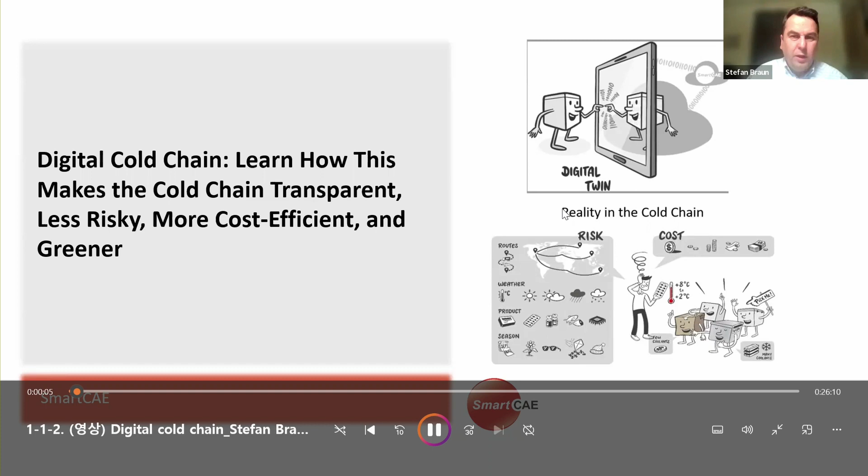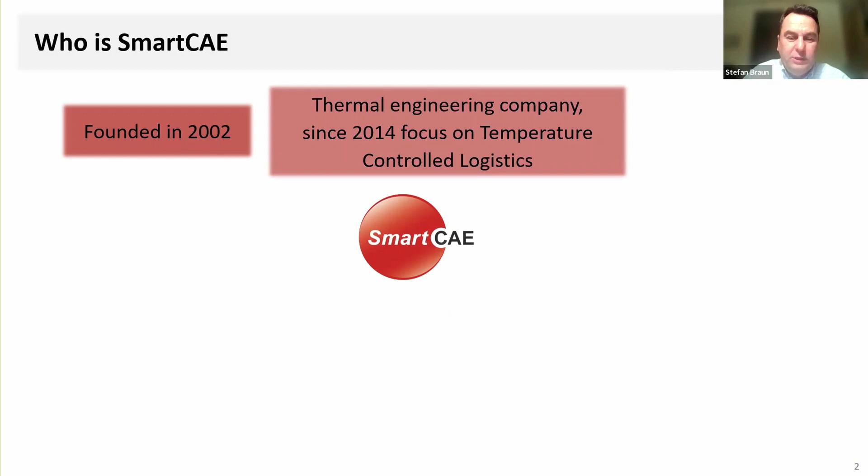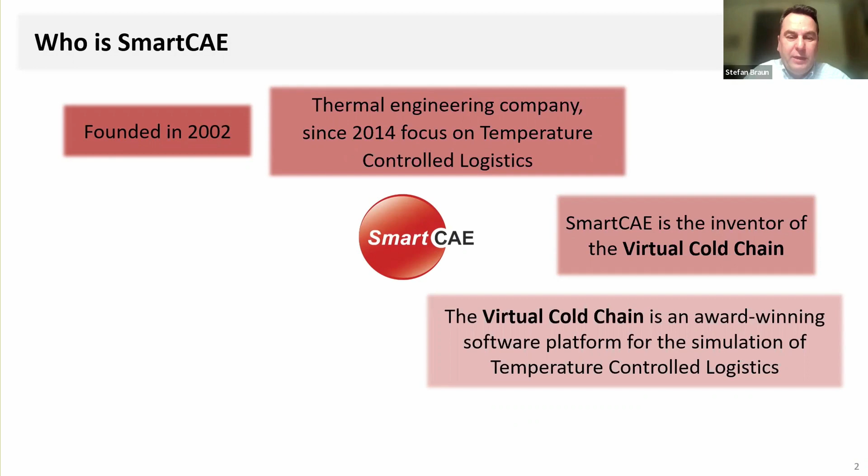First of all, only a few words. Who is SmartCAE? We were founded in 2002, and since 2014, we work on temperature-controlled logistics, and we built a virtual cold chain where we can connect all the different stakeholders on one platform and allow them to get transparency in their cold chain. We have customers currently in 25 countries around the world. We work with 12 of the top 30 pharma companies and with most of the global relevant packaging companies around the world.

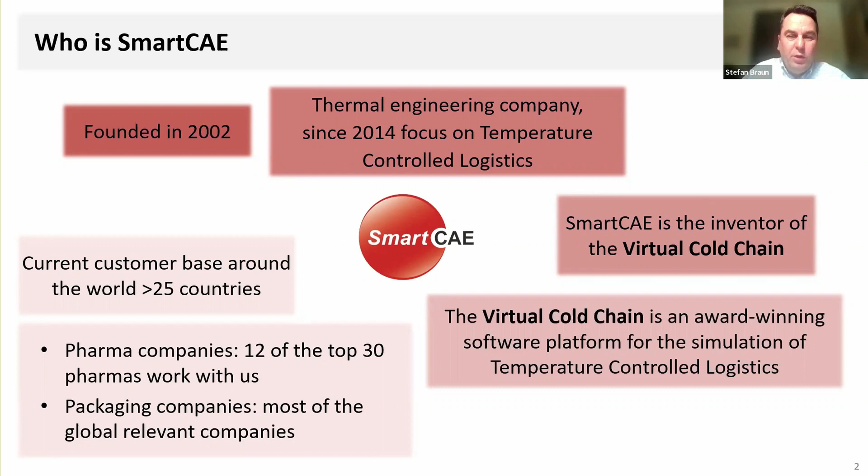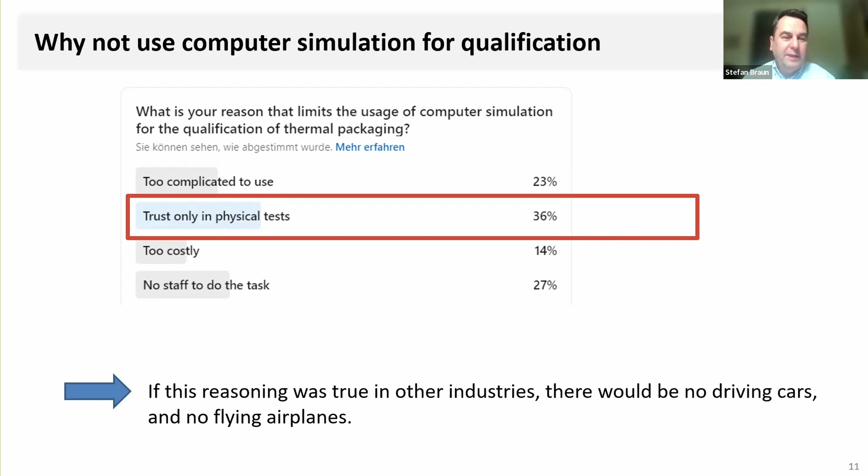So what is the idea of a virtual cold chain as a digital twin for your supply chain? First of all, we try to connect the different stakeholders - the packaging companies, the packaging providers, the pharma companies which have information about the product, and the logistics companies which have information about the lane.

Now we can match this together because we want to quantify, at the end of the day, the risk of having temperature excursions. Once we understand the risk, we can find out what is the right packaging we need on a lane, or what is the right service on a lane, and we can mix it up and find the best combination of both worlds together.

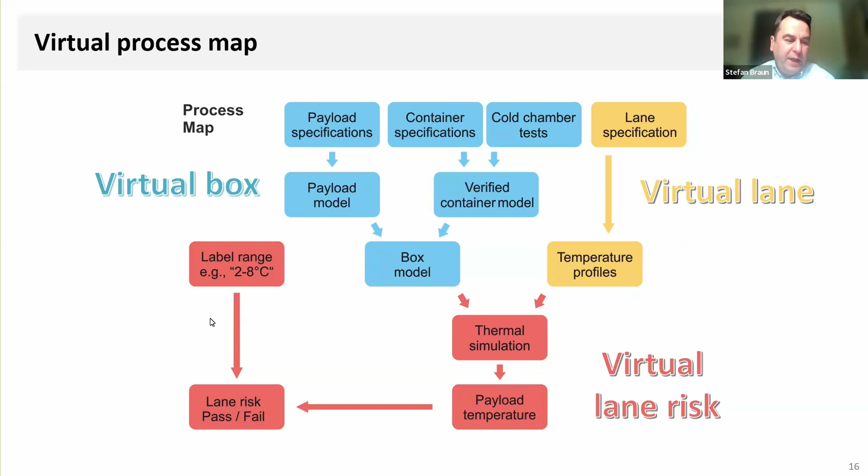The virtual cold chain is in principle made of different elements. One part we call the virtual box, where we have the information of our packaging system. Then we have the virtual lane, which mimics our supply chain environment, like the ambient conditions. If you have a virtual box and a virtual lane, we can run this all together - meaning we get an understanding of how much risk we have.

So first let's look at the virtual box. What is the idea of a virtual box? Here's a short overview - you see all the main elements.

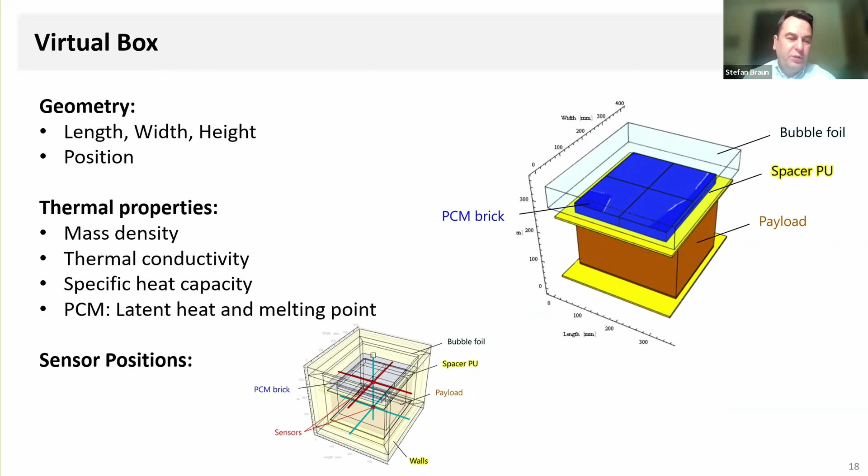You can put in cool packs, virtual loggers, all the parameters like the parameters of your coolant, the thermal properties. Then you can run this and see what happens in reality with all the different scalings. We have the product in - maybe it's a vial or a syringe - and we can also scale it up, say it's a pallet, and pallets in a reefer container, to make it as realistic as possible.

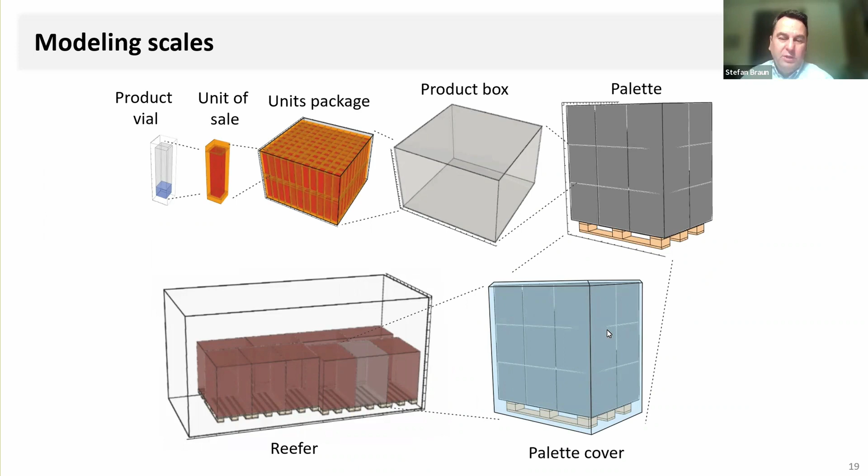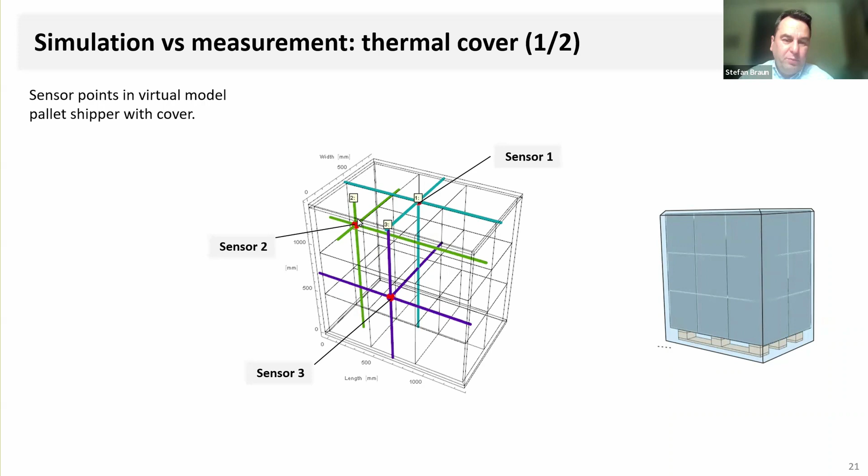So these are 3 different positions in our palette. You see here, these are the 3 positions. So we have one on the top, one on the side, one on the top in the middle. And we see all matches quite well.

But the only thing is, in reality, you have to wait 3 days and wait for a sunny day. In the virtual world, you can do it immediately on your laptop and see how it will perform.

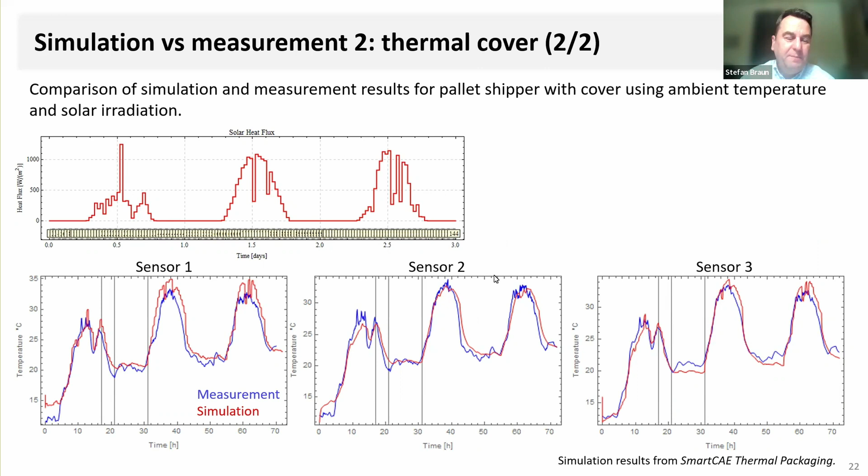So now we have a box. The next is we need a lane. For the lane, you have different options. In the synthetic world, we'd use some ISTA profiles or some worst case profiles or whatever we have.

But the best you can do really is use your logger data if you have ambient conditions. But in lots of cases, you have no ambient conditions about the shipment because it's maybe a new lane, or you don't really have a lot of realistic data. And for this, it's better to use historical weather data, or you can also use the weather forecast if you have this.

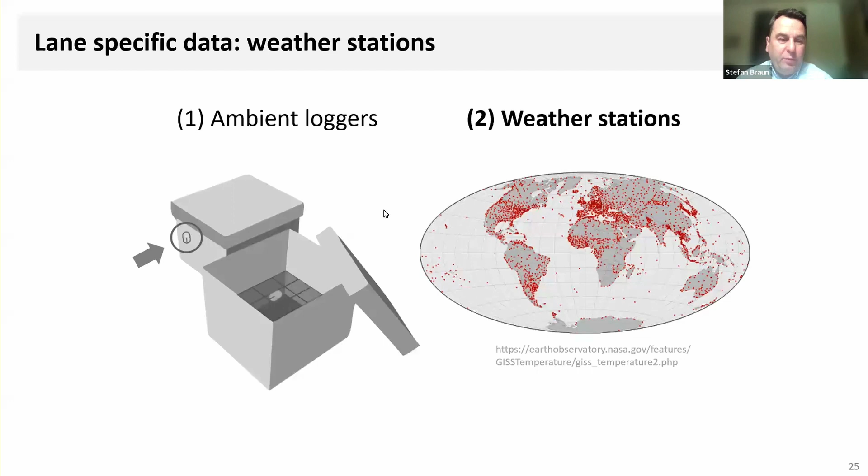So now how do we do this? We access all the weather points here, the weather stations of the world. And with this, we are able now to specify a lane. So you see here, a simple one from Germany over Atlanta to Chicago. And we have the different timestamps.

And we see here, this is ambient conditions, this is controlled conditions, we have here some sun. And then we can select also the weather station you want to use.

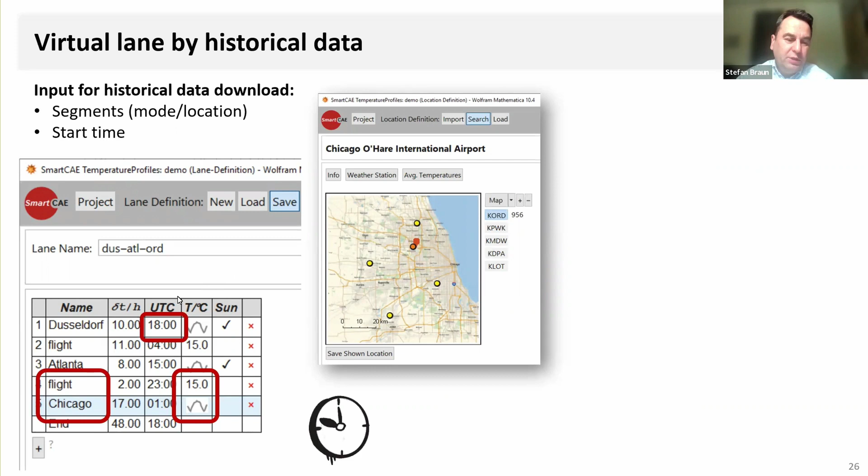So now we can also specify when we start in the supply chain. And then we can download all the lane data from the last, let's say, couple of years. We see here all gray lines are 1 day, and we have around 1,500 days.

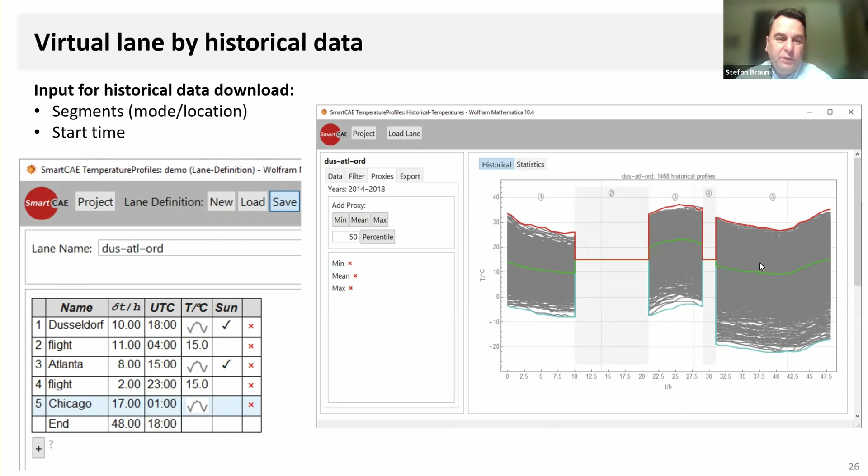And then we can use this to generate a hot and a cold profile, maybe for a test. Or we can use later all the gray ones for a simulation. So we can also use the weather forecast if you want to know what happens tomorrow.

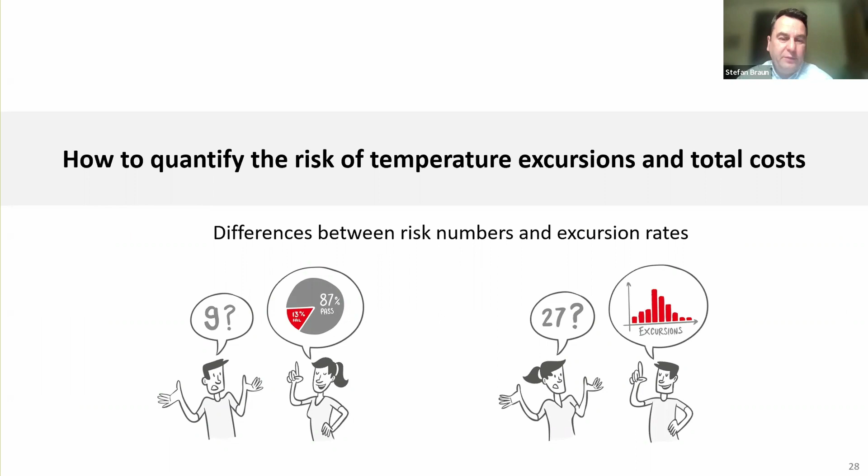But now we have a box, we have a lane. Now we want to quantify the risk and the total cost at the end of the day. How do we do this? We do it relatively pragmatically. We use all the boxes, use all the lanes, run these scenarios, and know exactly how often we will pass and fail. We don't use any risk scoring, because risk scoring is always related to the ambient conditions.

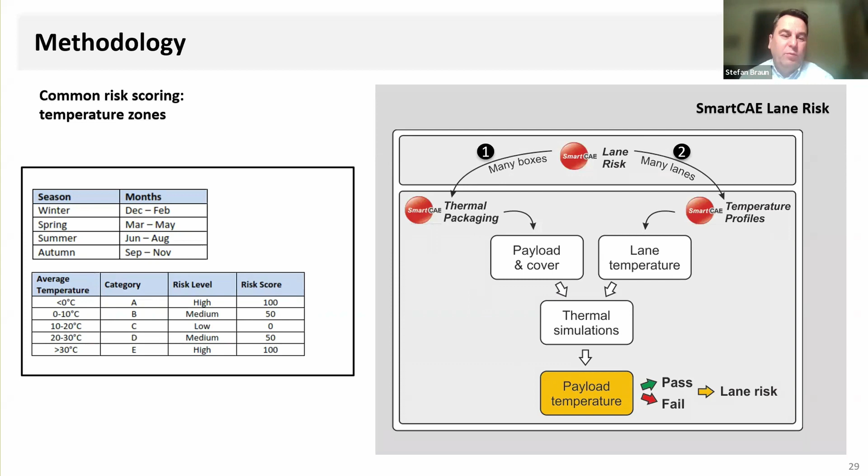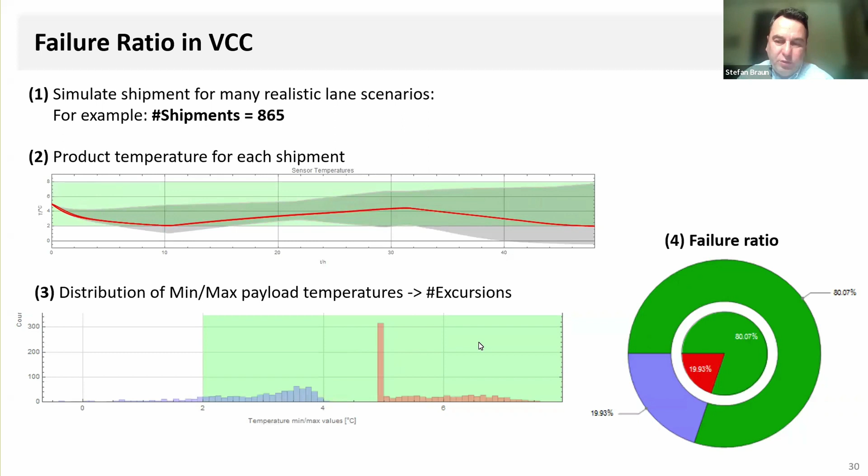And we have now here exactly the number of excursions for these 865 shipments, and then we can specify a fail rate for this. So if we have this, we can also look at the total loss costs.

For this, we have first the cost for packaging, the cost for shipment. We can do this also in an Excel spreadsheet, but cost for compliance are directly related to excursions. So each excursion costs you some money, and if the excursion is too extreme, we have maybe a product loss if we're out of stability of our product data.

And with this equation, we can specify the total cost of ownership for a shipment. And then we can use this to optimize our system.

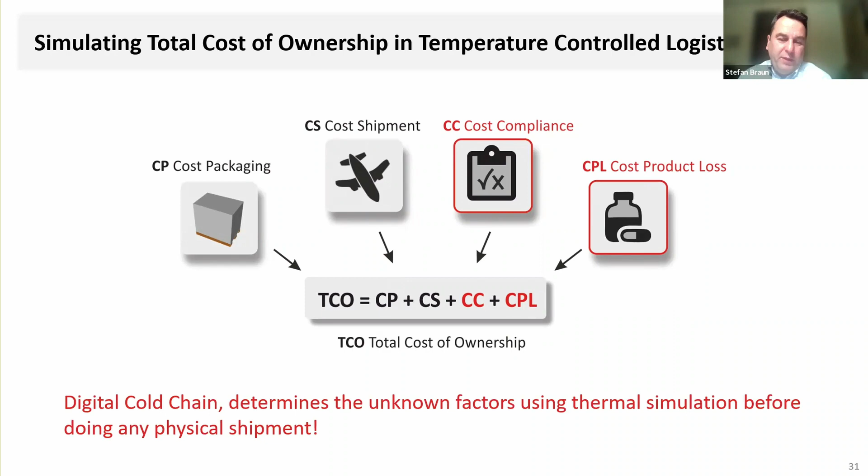So we have in principle 2 types of lane risk assessment. First is we use historical ones. Second is we use predictive.

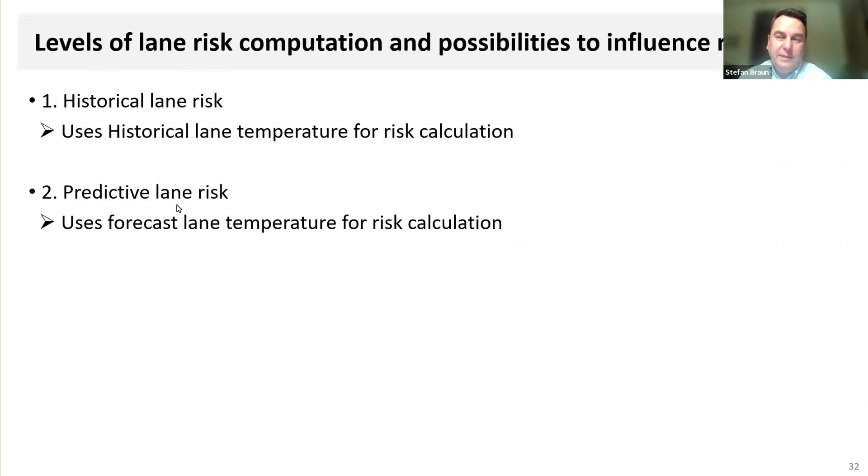For the historical one, we apply historical data on a shipping system. And with this information, we can run all the different scenarios, and then we know how often we will pass, how often we will fail.

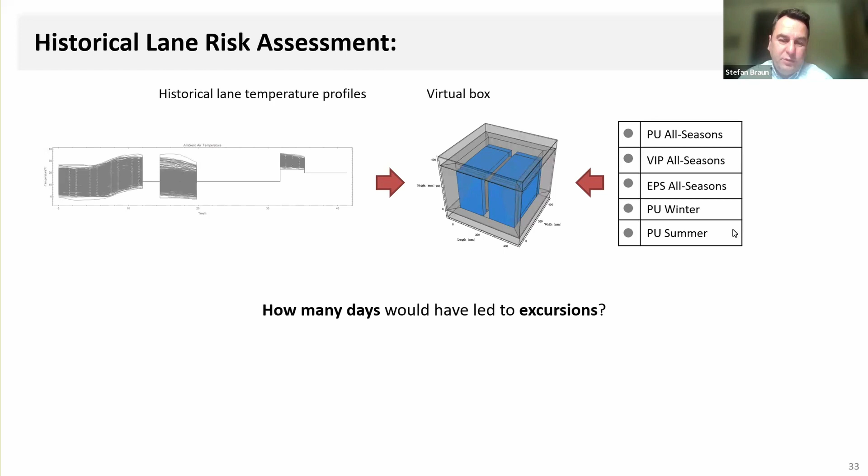The reason for this, like here, is it too cold? Is it hot, or is it hot and too cold? And then we can use this to mitigate the risk. So this means we can use maybe the right box, or we can use a combination of boxes to make the risk as low as possible.

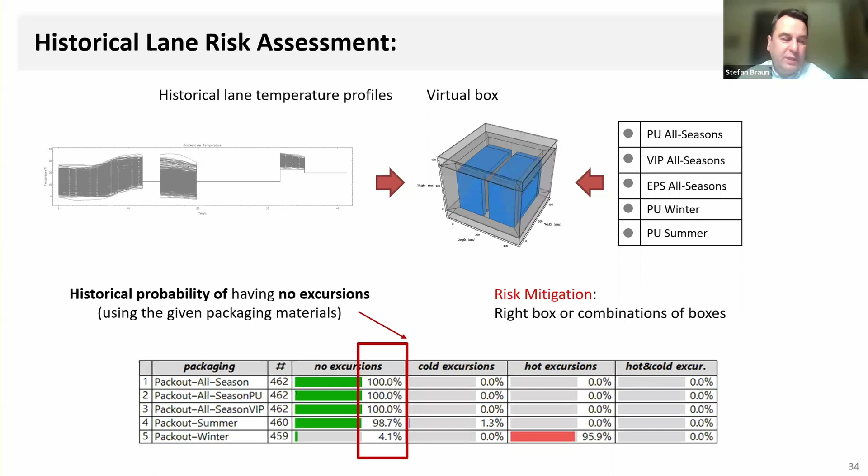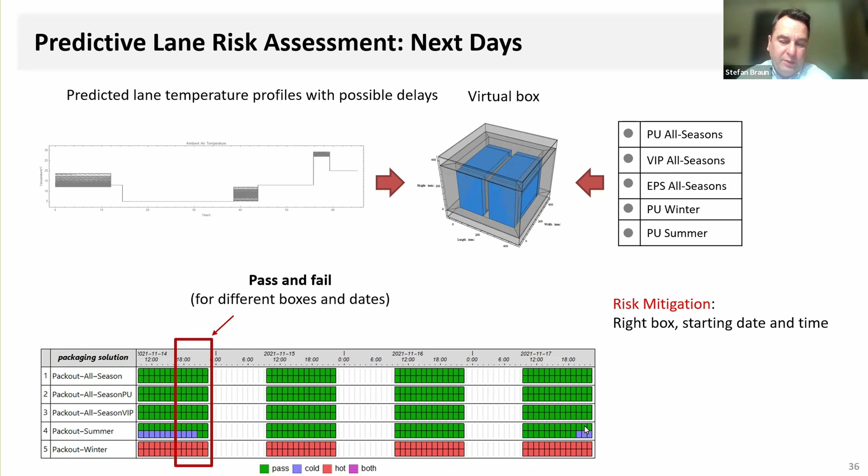If you use a predictive lane risk, it looks a little different, because typically we use the weather forecast for the next couple of days, and then we can get information back and say, oh, on which days we can ship, and which days we cannot ship, and on which hour we run into trouble if our lane starts with this.

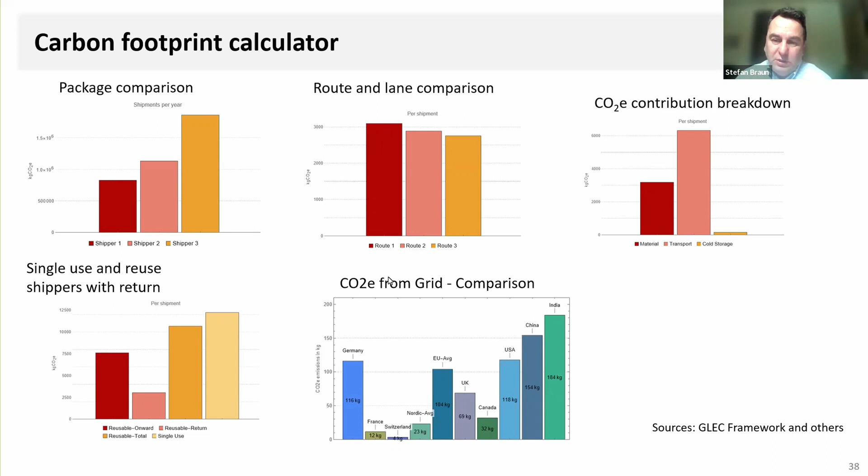Now let's look a little bit more on some example cases. I call them the what-ifs, because at the end of the day, we always look at what-ifs. You know, we have all these different typical questions.

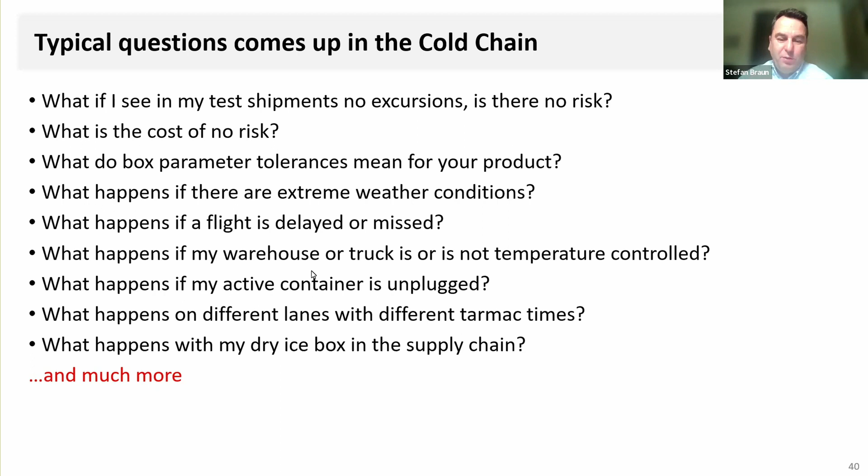A lot of these different things we always see, and we have much more. That's only a small part of this. I will show you some small examples which will address these topics.

First is a typical question: what happens if we have extreme weather conditions? Extreme weather conditions is something that can really cause trouble if we have not planned for it, or if maybe our planning is not good enough.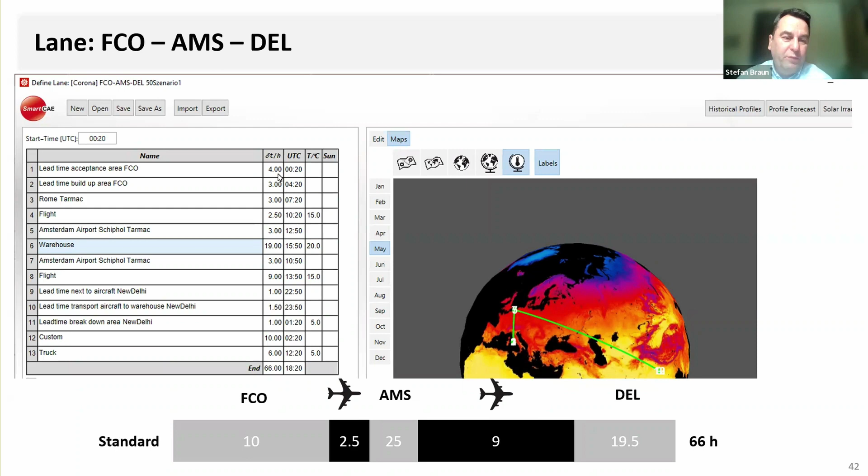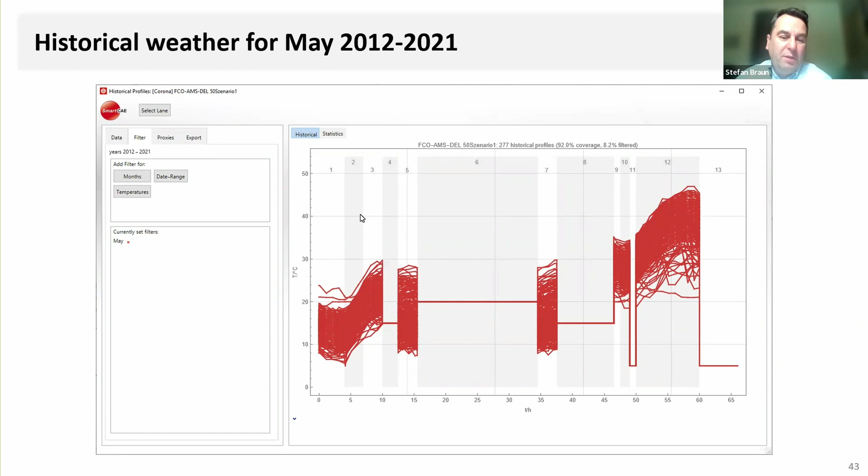I have an example here. I ship from Rome over Amsterdam to New Delhi, and you see here all my timestamps on this lane with all the loading, unloading, and the tarmac time. With this, we can look at the ambient conditions. We look at data from May 2012 until May 2021, and see what happens with our packaging system. We also have some data of our product, 2 to 8, including some stability data of the product.

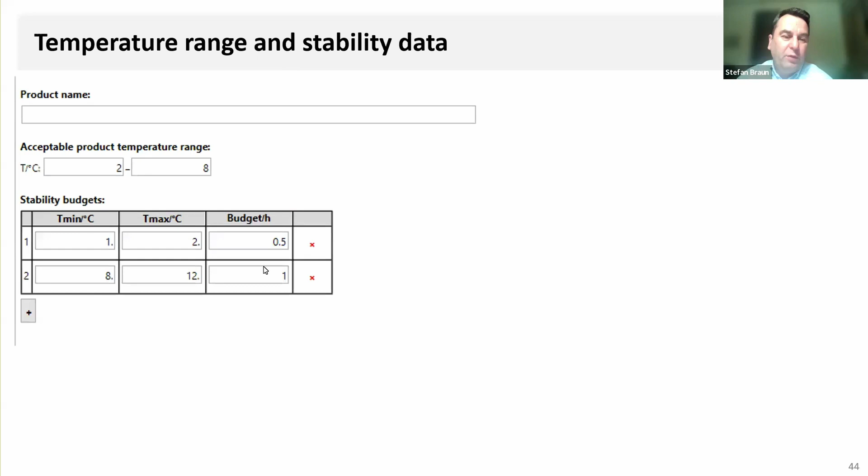Now, if you run this, we see we have 3 solutions here which do the job quite perfectly. Everything's 100%, no excursion, no risk, perfect. But what happened last year?

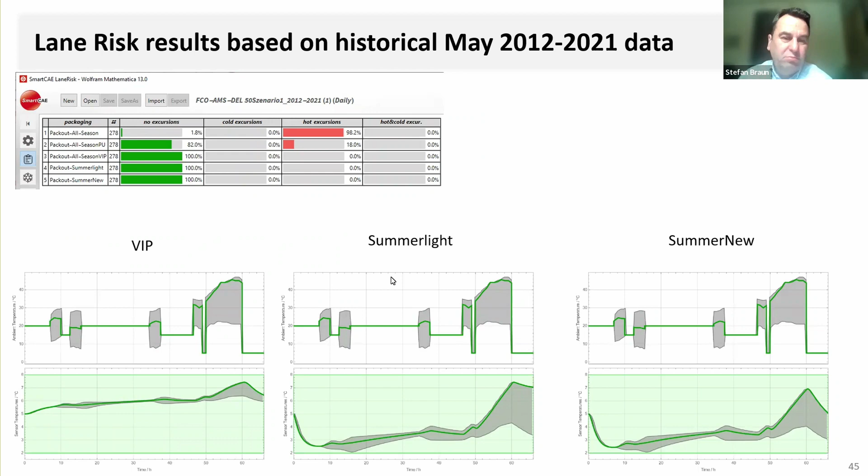We had a heat wave in India, around April, May, and this was some extreme weather. You see here the map of India, which comes from the European Commission, and we see quite a lot of differences here.

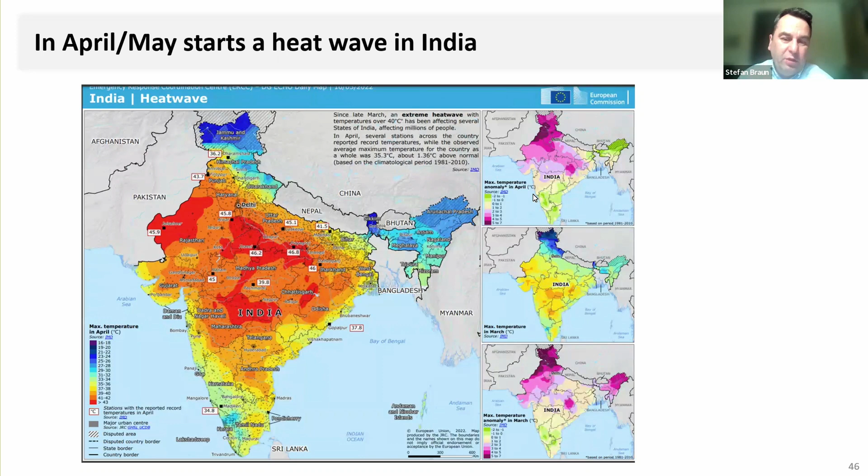If you look at some weather forecasts on specific days, we saw with our three shipping systems that one shipping system shows a problem on 2 days, because the weather was too hot, warmer than planned. We see the ambient condition here, and this is the product, and ambient was higher than planned, so our product goes out of temperature range.

So that's a problem for our product here. But if we look at the weather forecast, we can also say, okay, maybe we ship it a day later or a day earlier, and we are still fine. That's maybe an outcome of this.

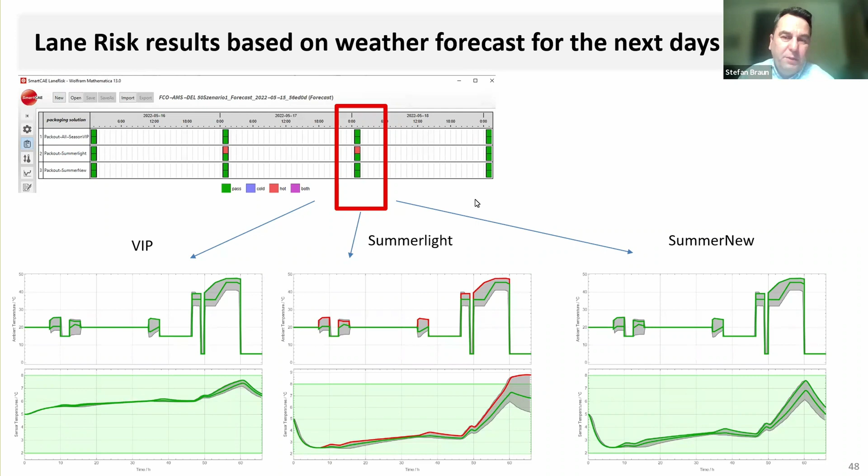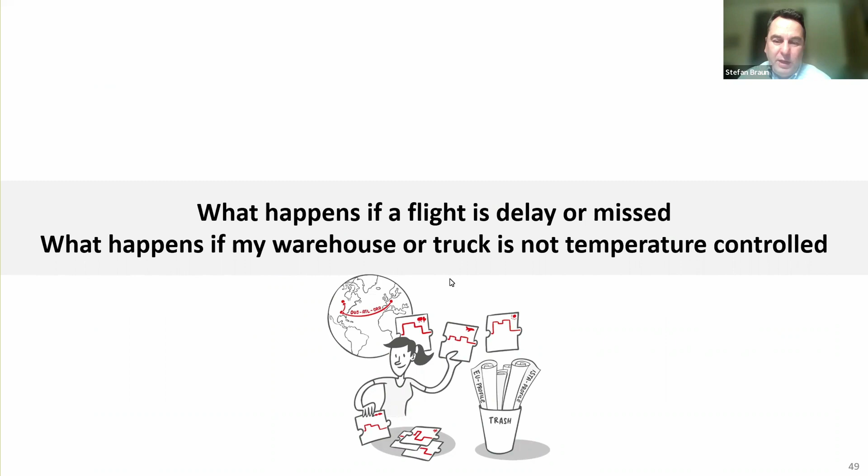But also, in these situations, it can happen that something goes wrong in the supply chain. Maybe we miss a flight, or our flight is delayed, and maybe we don't have the right warehouse or truck. So we use the same scenario and say, okay, that is now our supply chain, and we have the problem.

Maybe our flight is delayed, and if the flight is delayed, we have a 24-hour stop, maybe in Amsterdam for storage. The question is, should we have an ambient storage or a 5-degree storage? We want to figure out with the simulation what this means for us.

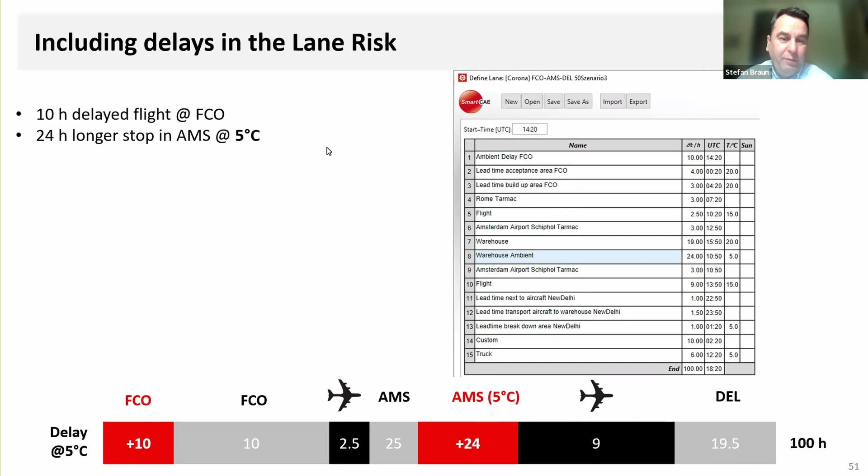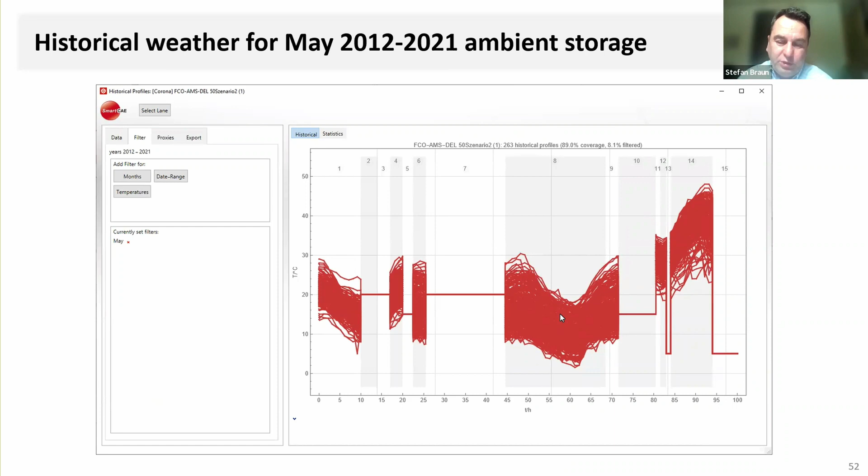And we see here the percentage of fails. What happens now if we put them in a 5-degree warehouse? We see now the VIP box now does the job perfectly. The others show interesting scenarios.

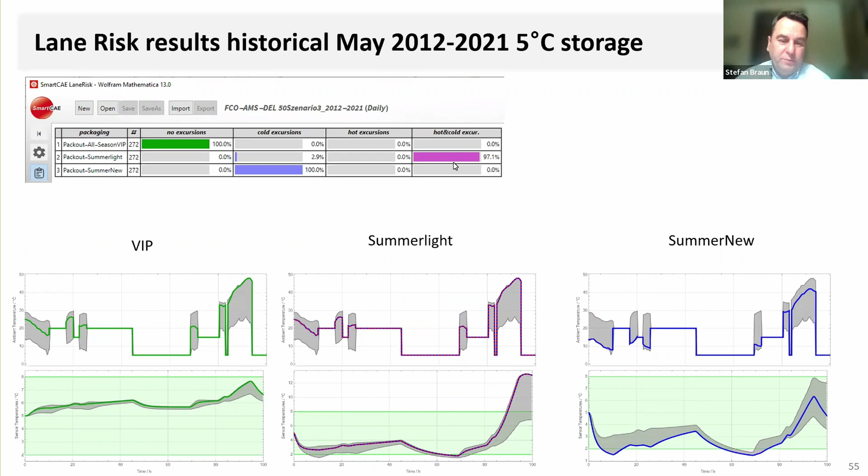The Summer Light box is going too cold and too hot. And the Summer New box, which includes some ice packs, goes too cold, because we have a box which works good in warm conditions, and we put this in a 5-degree warehouse, in principle a winter situation, and then we can see it's going too cold. But this is also an interesting scenario, where we want to figure out what is the right box to minimize the total cost at the end of the day.

So it's a little bit the same scenario. We have Rome, Amsterdam, New Delhi. Our product is 2 to 8. We have some stability data, the same like before. We have some different boxes, and we specify again our lane here. And we know all freight rates are totally different.

Then we have the mass of the product, which relates to the transport costs we have here. Then we have cost for an excursion. When we have an excursion, it costs us some money, because we have to report it, we have to write some paperwork, and this could be really costly. And if something goes really wrong, maybe we lose our product - that's the most costly. And we have also here the number of shipments by month.

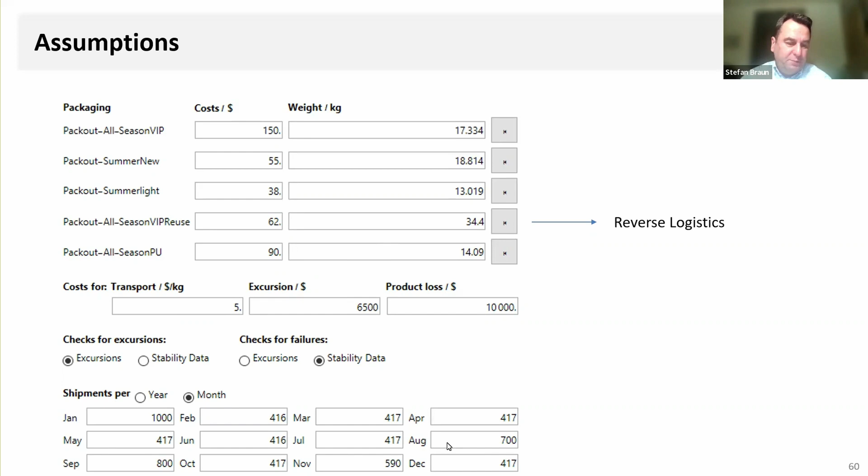And if we use this, we see first on the top level the number of excursions. We see here some boxes do the job quite well, some boxes show some problems. Here, this box has a problem from May to July. But we see also with this picture here, maybe some combinations can make sense. And we see here the exact percentage.

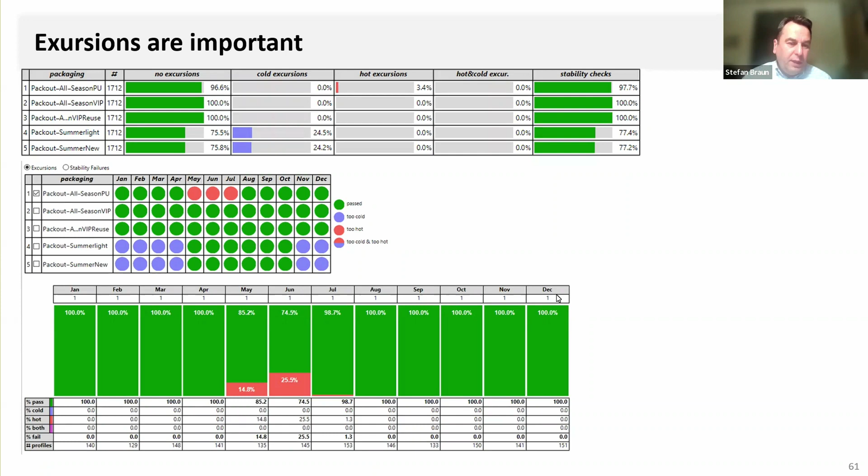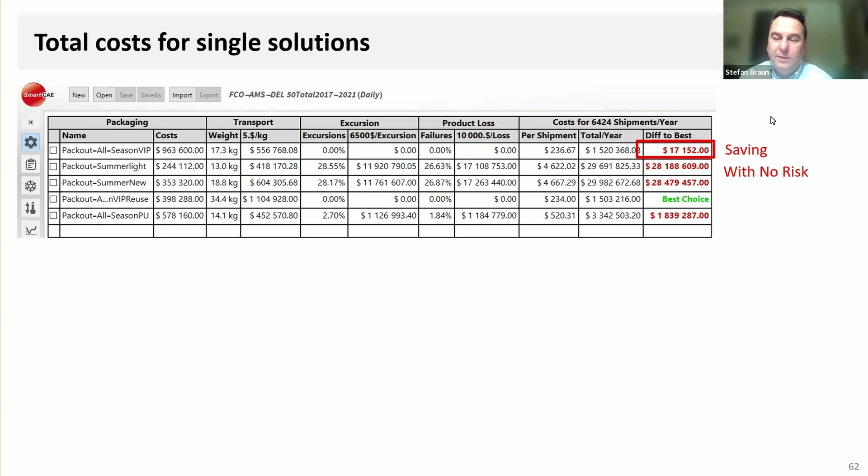We can also go a deep dive in. But now we can also here - that's the most complicated table I have in my presentation here, but it's not so complicated. It looks like we have the cost for the packaging, the cost for the transport, cost for excursions, cost for product loss, and then we get here the total costs by shipment. And with this, we can figure out what is the best choice in a single solution way, but with the system, we can also find out what are the costs for the best combination.

And we see now there's a lot of savings if we use also combinations by months. And we see here we can do it with two types of packaging, the Summer Light box and the PU box. And we save around $600,000 by 6,400 shipments, so around $100 by shipment.

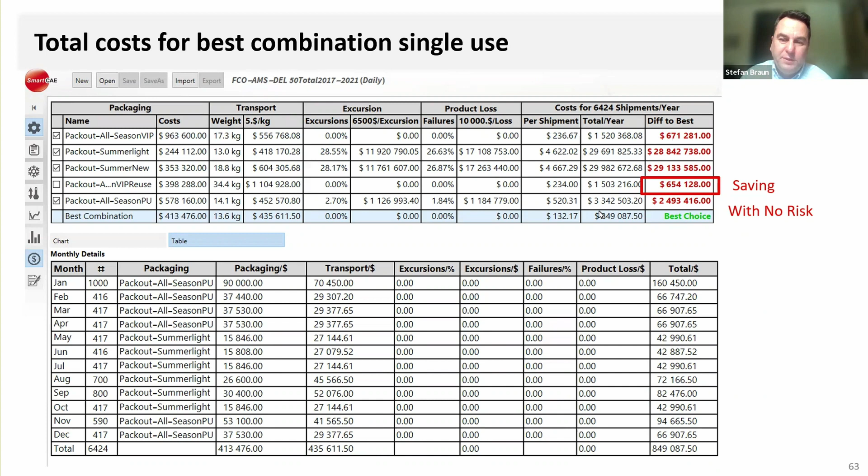But we can also look closer at the CO2 footprint, because if you have now the costs, we have also now the compliance. We can also look and say, okay, which of these different boxes works for us under CO2 footprint aspects. So first of all, again, we have our lane. We have now, depending on the type of the boxes, a CO2 footprint for the production of the boxes.

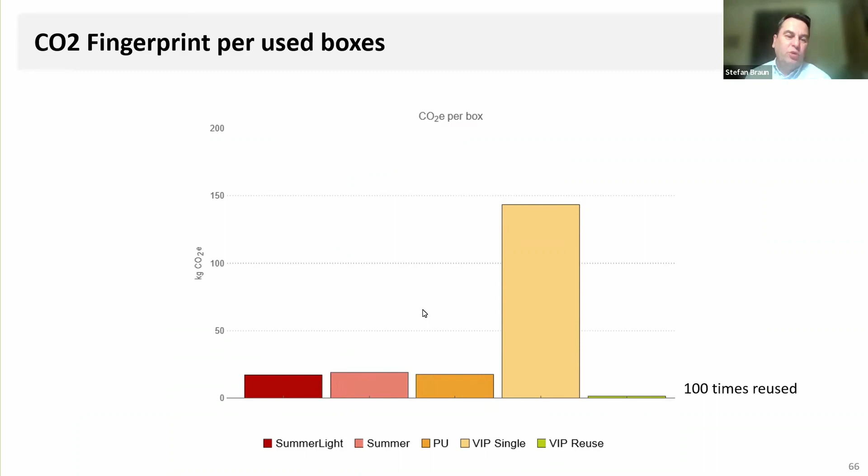So we see here that's the Summer Light box, the Summer box, we have the Summer PU box, we have a single VIP shipper, and we have the VIP shipper when we use it 100 times. So that's the CO2 fingerprint by box - what it needs to produce the boxes. And we also have the price, what we have to pay maybe for a certificate of the CO2.

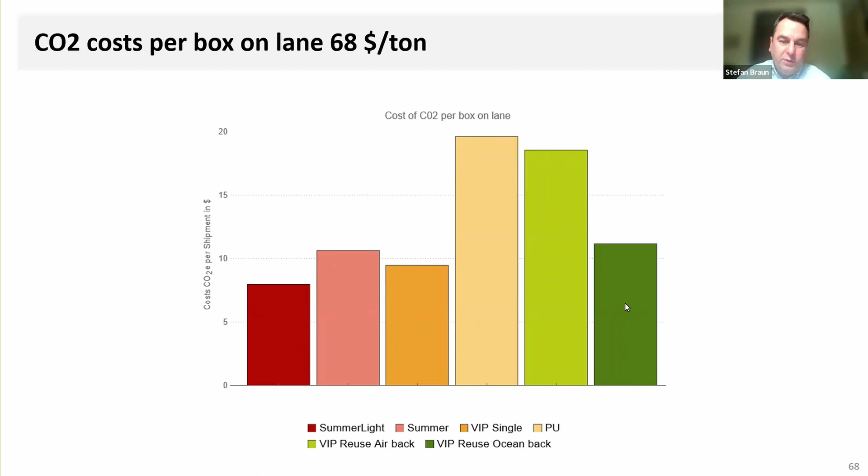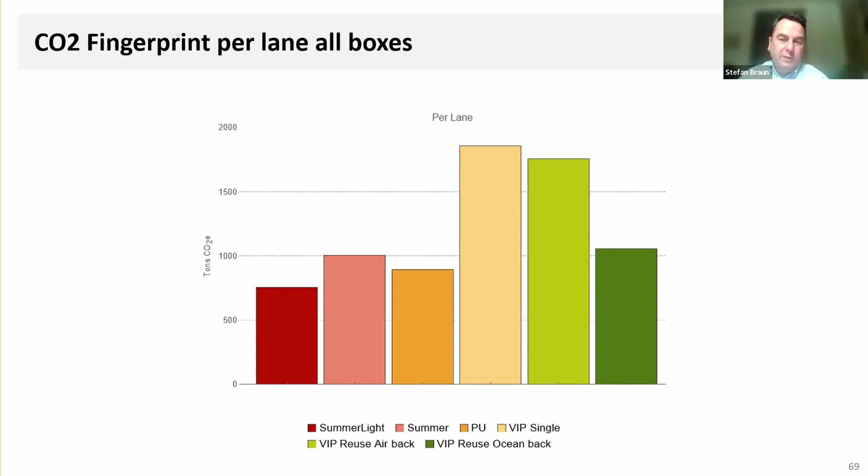So now we can also look, what is the cost of CO2 per box on the lane? So we see now that's the CO2 price on this lane by box. We can put on top - so if we now look at the number of shipments, that's the total CO2 fingerprint of all the boxes on the lane. And you see that's all the boxes, and we have not looked at which are compliant or not. But when we remember back from the results before, you can look now first at which boxes are compliant, single usable boxes.

So we have one box for the whole year, and we have here three options. We have the VIP single shipper, we have the same but we bring it back by air, and we bring it back by ocean, only to have a different transport mode back.

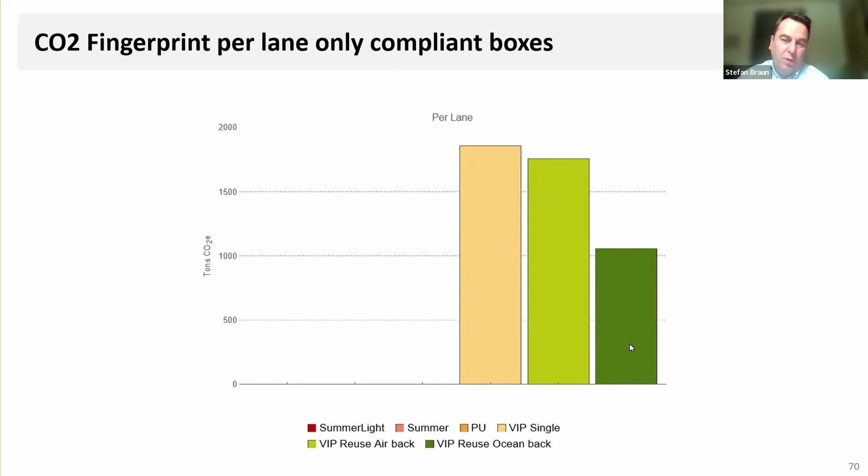But now when we compare this with the solutions which also work on combinations, we see there are some combinations which do the job as well. So we have the PU Summer Light box, the VIP single and Summer Light box combination, and the VIP box when you bring it back by air.

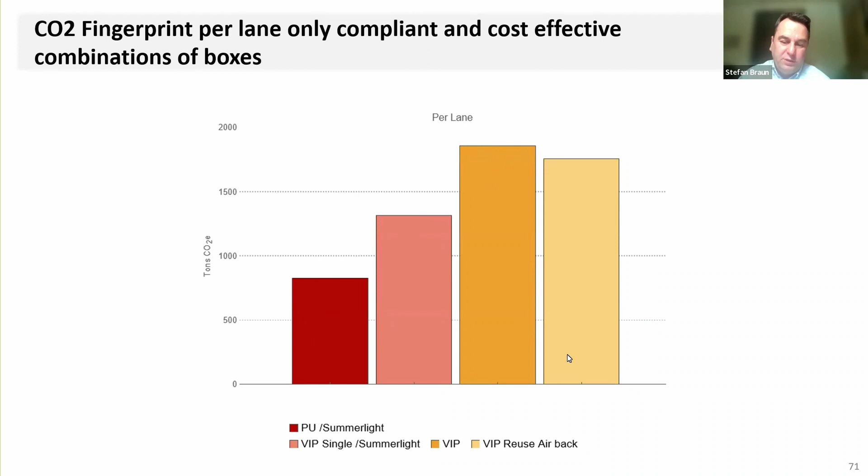Now we can look at what this means in total costs. My reference is the PU Summer Light box, and that's the extra cost we have for the different combinations. So we see the PU Summer Light box was the cheapest one. This is what we found before.

But we can also put on top the price of CO2, which comes on top when we transport this in the lane. We see a bit of a change, because before the VIP box was more expensive than the reusable box. But if we put the CO2 costs on top, the reuse one with VIP is a little less cost effective, because transporting it back generates CO2 and makes the price higher.

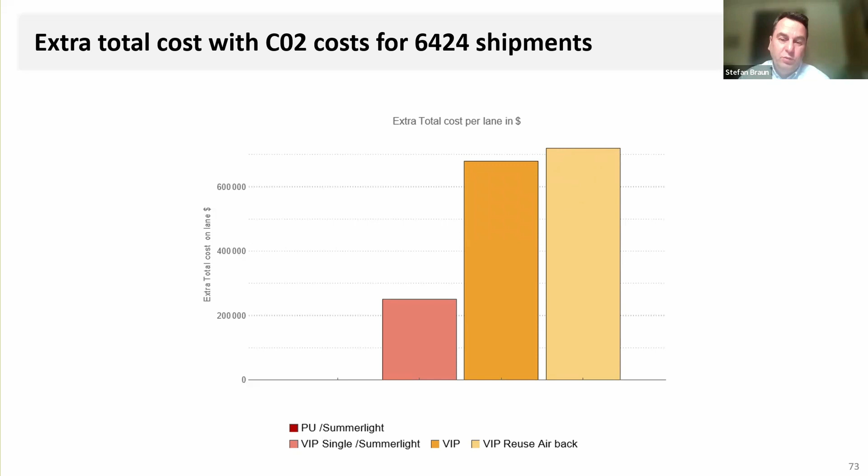But I think at the end of the day we come to this result, because this shows us the extra gain of CO2 we have for the different options.

First, always related to zero, that's the PU Summer Light, and that's the difference in percentage. We see the second one, the VIP single and Summer Light box, is around 60% more CO2 than the best combination. And if you take the VIP box, we are more than 125%. The reusable is a little bit smaller in terms of CO2 gain.

But we see that's some low-hanging fruit. If we get a better understanding of which boxes are compliant and cost-effective, we can use the CO2 fingerprint at the end of the day to determine which box we should use to fulfill these three topics.

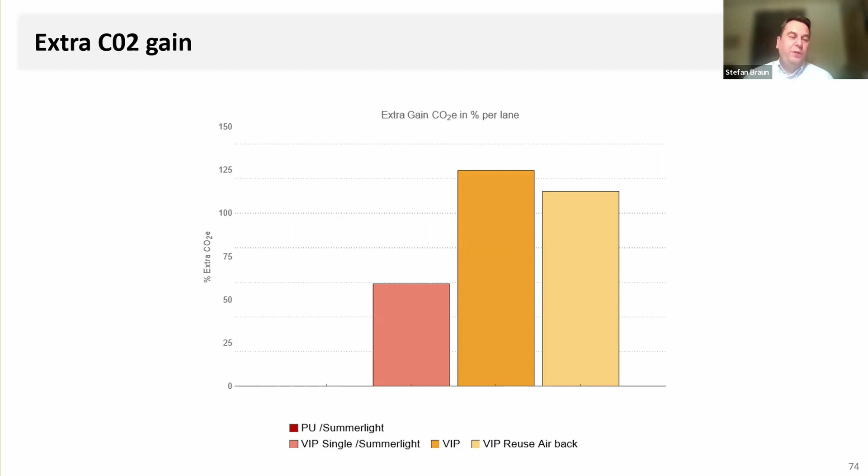Compliant, cost-effective, and green. My key takeaway is this: we have a digital twin for temperature control logistics, and this allows us to play with all the what-ifs. It helps us reduce temperature excursions, look at total costs and try to minimize this, and gives us a good methodology to make the CO2 carbon footprint transparent.

This helps us bring these together, because in pharma shipments compliance always comes first, since it brings us nothing if everything is cost effective and green but we are not compliant. So we have to look first at compliance, and then figure out how to make it cost effective and green.

That's my key takeaway, and I hope you have some questions for me and get some ideas out of my talk. I wish you a good rest of the conference, and maybe see you again at some other conference in the real world. Thank you very much for your time, have a good day.